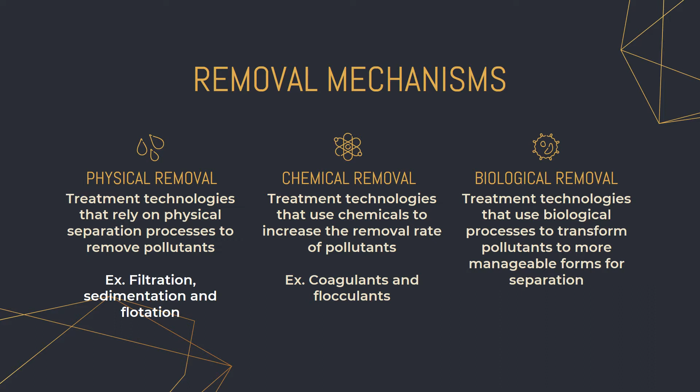There are three removal mechanisms involved in the process of water treatment. These include physical, chemical, and biological removal. So physical removal is the mechanism employed in treatment technologies which mainly rely on separation processes such as filtration, sedimentation, and flotation. For chemical removal, coagulants and flocculants are used to increase the removal rate of pollutants. Lastly, for biological removal, this mechanism transforms pollutants into more manageable forms for separation.

Currently, there are a lot of commercially available treatment technologies. These technologies treat sewage to attain the specified water quality. Pertaining to their mechanism, these technologies are categorized into three major types: biological, physical, and hybrid processes.

Biological processes. These are the common treatment technologies under biological processes. First, we have SBR, or the sequencing batch reactor, which is based on an activated sludge process. I will explain this further on the next slide. Next, we have natural systems such as subsurface wetlands. Lastly, we have RBC, or the rotating biological contactors. In RBC, wastewater is purified using microorganism membranes. These membranes are attached to discs.

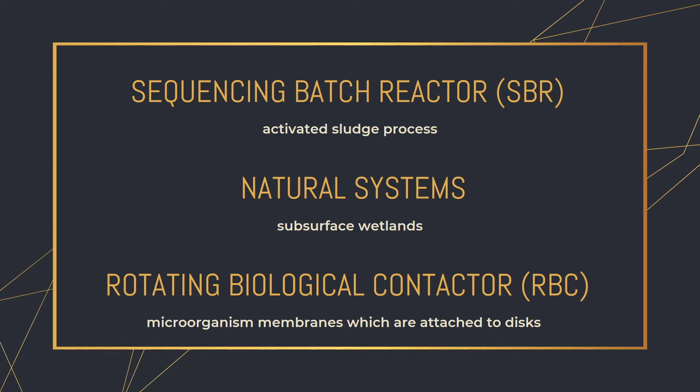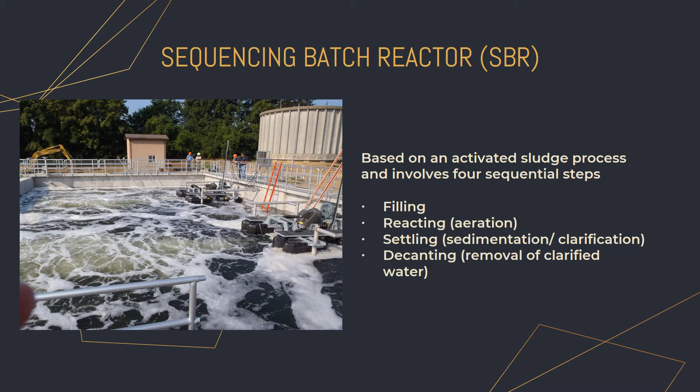SBR, or sequencing batch reactor, is a fill and draw type of activated sludge system, and it involves four sequential steps: filling, reacting, settling, and decanting. This is the schematic diagram of the SBR process. So again, the first step is filling the reactor, the next is the aeration or the mixing, then settling, and then decanting of the clarified water. To further visualize and understand this process, I have provided an animation in the next slide.

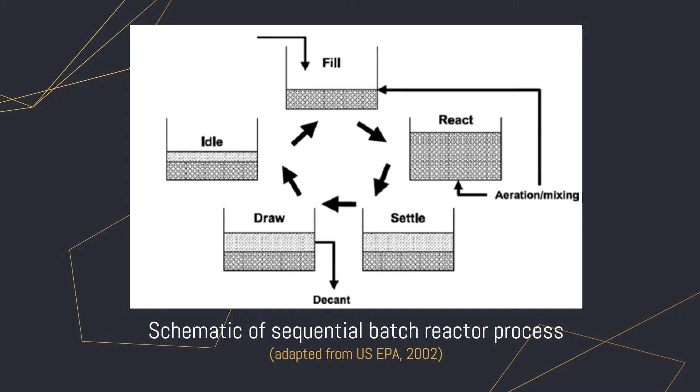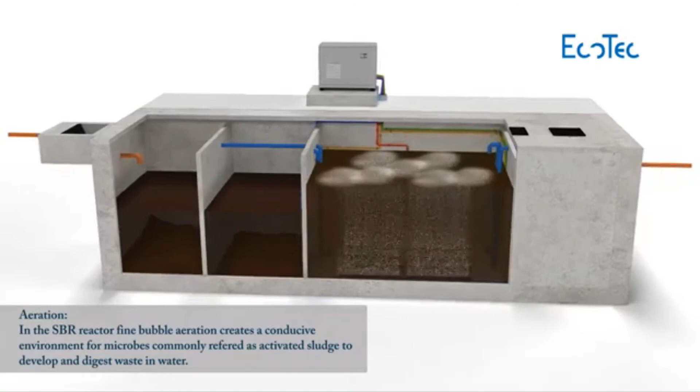Treatment commences when sewage water from the building enters the collection tank. Heavy solid particles settle to the bottom portion of the collection tank. Accumulated sewage is pumped into the SBR reactor for treatment. Aeration in the reactor further purifies the wastewater. Fine bubble aeration supplies oxygen to the microbes. Microbes, also called activated sludge, multiply and consume waste in water.

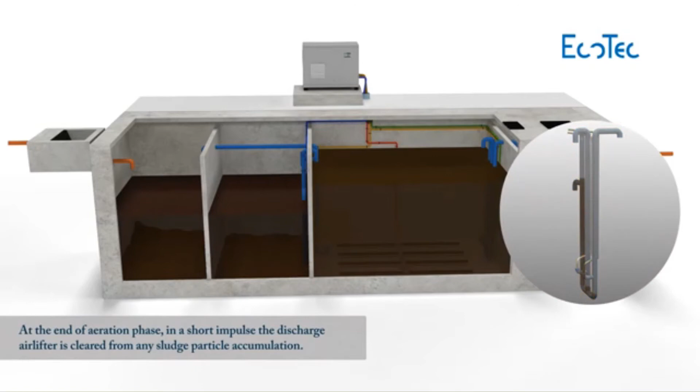In a short cleaning pulse, the discharge airlift is cleared from any sludge particles. During the sedimentation phase, activated sludge settles to the bottom. A clear water zone is formed on the upper layer. Clear water is removed from the reactor through the EcoTec airlift pump. This clear water can be further filtered for reuse and recycle.

Physical processes. The common treatment technologies which involve physical processes are sand and media filtration and membrane filtration. Sand and media filtration involves the removal of suspended matter as well as floating and sinkable particles. Membrane filtration involves micro, ultra, and nano filtration and reverse osmosis.

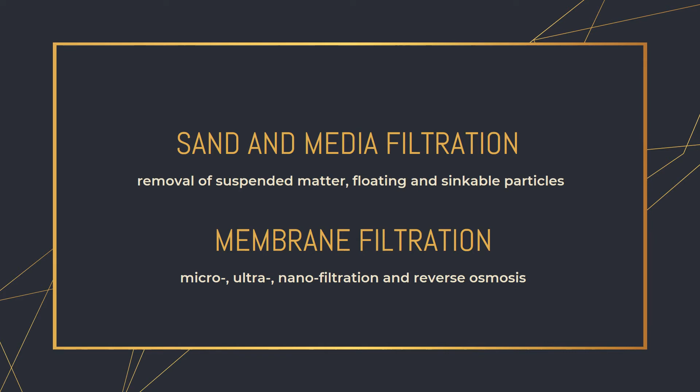Hybrid processes combine physical, biological, and chemical processes to attain optimum results. An example of a hybrid treatment technology is the combination of biological processes and physical processes, such as the fine solid separator. Another hybrid technique is the MBR, or membrane bioreactors. Because of its advanced level of organics and suspended solids removal, MBR is considered one of the most effective treatment techniques.

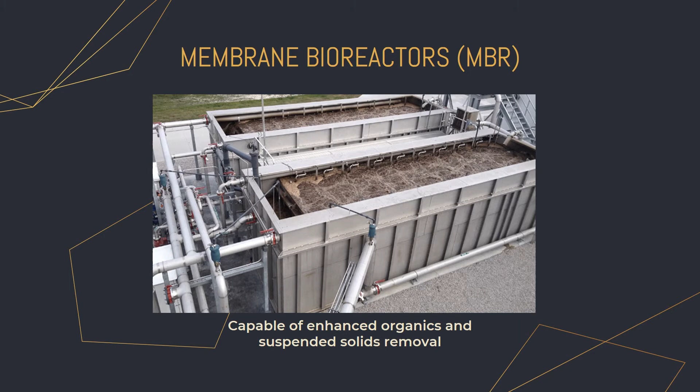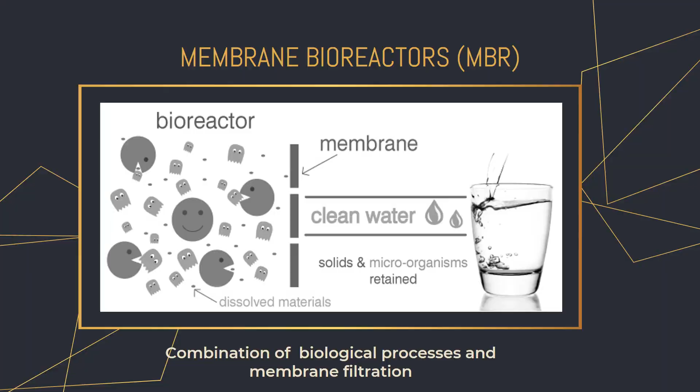Membrane bioreactors combine conventional biological processes with membrane filtration. Because of membrane filtration, MBR type facilities are compact in size and simple to operate. They also reduce sludge production as well as produce high-quality water. The first step of the treatment process is the mechanical screening of incoming wastewater. The screened wastewater flows into the anoxic tank.

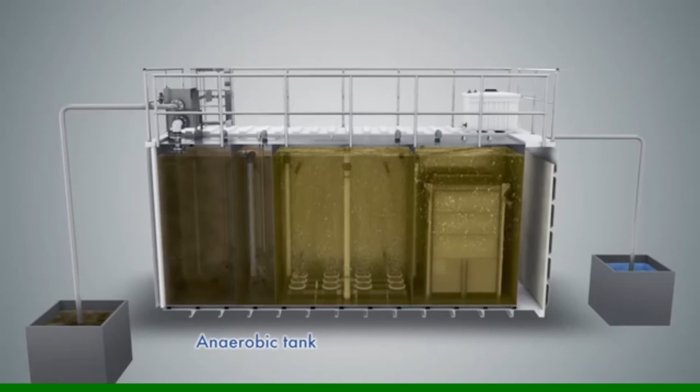Within the anoxic tank, a submergible mixer blends the screened wastewater with mixed liquor returning from the MBR tank to achieve the desired level of denitrification. In the absence of dissolved oxygen, nitrate is converted into nitrogen gas in the tank. From the anoxic tank, mixed liquor flows to the anaerobic tank. The anaerobic process triggers the discharge of phosphorus by microbes in the anaerobic state reaction.

From the anaerobic tank, the wastewater flows to the aerobic tank, where oxygen is injected using air blowers and a diffused aeration system. In this oxygen-rich environment, organic material and ammoniacal nitrogen are biologically oxidized into carbon dioxide, nitrate, and water. From the aerobic tank, mixed liquor flows to the MBR membrane tank for liquid-solid separation.

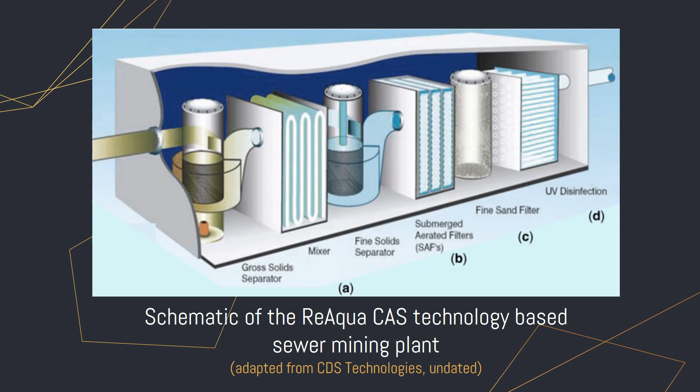Another hybrid technology which utilizes biological, chemical, and physical processes is the ReAqua chemical-assisted separation process. This was applied to deliver Sydney, Australia's first sewer mining project. As seen on the diagram, ReAqua involves both gross and fine solid separators, submerged aerated filters, a fine sand filter, and finally UV disinfection.

Based on the diagram on the previous slide, here are the four key treatment steps used in ReAqua. First is the physical and chemical process of removing fine solids through coagulation. Next, a submerged aerated filter enables the biological process of organic and nutrient removal. For the third step, another physical process is involved in removing fine solids, but this time using the sand filter. And for the last step, UV disinfection is usually coupled with chlorination.

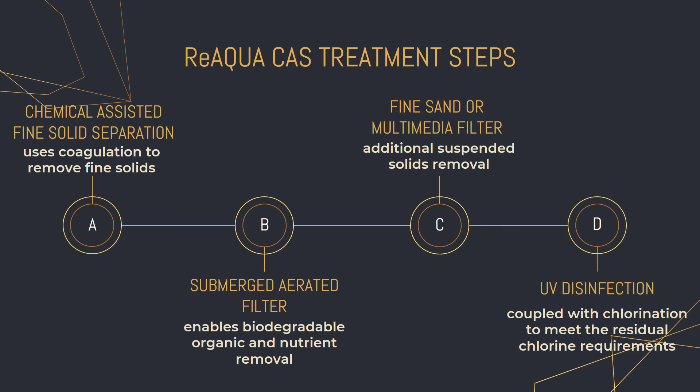In conclusion, treatment technology should be rapid, compact, and low in capital cost in order to be effective.